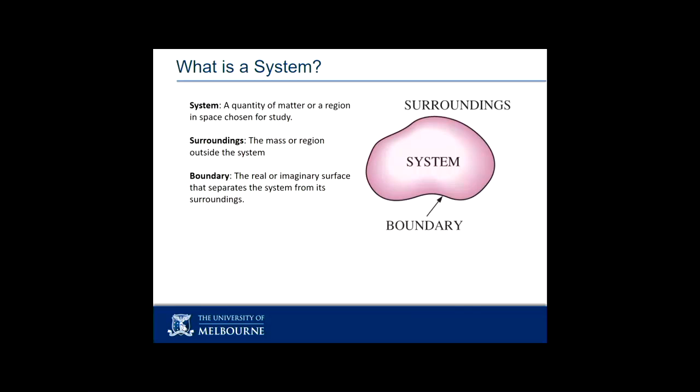Sometimes your system might be two molecules, and you're just analysing how they bounce, and then you are forgetting about all the other molecules and what have you. So you have choices that you can make. Early on in the subject, we have some really standard systems that we use for analysis because they have nice properties. So you will find us looking over and over again at a piston cylinder. And sometimes the piston will be at the bottom and sometimes the piston will be at the top.

But it'll generally be a container, and often we'll imagine them as circular cross-section with a disc that's either sitting, floating on a liquid or a gas, or a disc that's being pushed by something, like in a car. That system has some really nice properties. It's got some fixed boundaries, it's got some moving boundaries. Now there's some new terms.

All the way through the next 6 weeks, we will keep learning new code words. They're words that you've encountered before. You may recognise the word, you may understand the word, but they have a special use in thermodynamics. If I tell you that I have a fixed boundary, it has a mathematical implication to how you're going to solve the problem. If I tell you I have a boundary that can move, it has a mathematical implication on how you solve the problem.

So often I'll be highlighting words or bolding words, and I'll try to draw your attention to them. When they are not just an adjective, not just a description, they are triggers or code words for how my maths is going to be applied. So in the system, fixed boundaries are pretty easy to imagine because they look like walls, even though they might be imaginary boundaries. The fixed boundary of the door that's open at the back of the lecture theatre is not moving, but it doesn't exist.

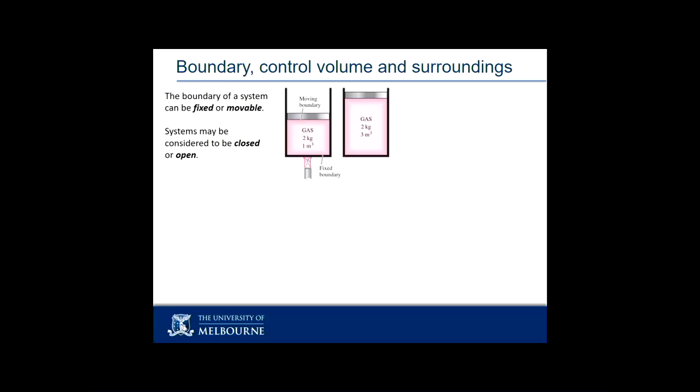Closed and open boundaries, again, code words. What I'm interested by when I define a system boundary is I don't care what is the surroundings, but I do care the influence that they can have on my system. There's two major ways you can influence your system from the surroundings. One is by mass coming into the system, and the other is by heat transfer in or out of the system.

The mass transfer can only happen if I have an open boundary. So the reason why we have this code word of closed boundary, if I tell you closed boundary, I'm also telling you there can be no mass transfer from the outside world to the in or from the inside world to the out. The mass of my system is fixed if I use the code word of closed boundary. If I use the code word of open boundary, my mass can change and I will probably need to keep track of the mass of my system. And I'll need to keep track of the mass flows across the boundary.

Both a closed and an open boundary can have heat transfer across them, unless I deliberately tell you a code word of an insulated device, in which case insulated will mean no heat transfer. So the difference between a closed system and an open system: the closed system has a fixed mass and can't change its mass. The open system, the mass can change. Both of them, heat can transfer across the boundaries.

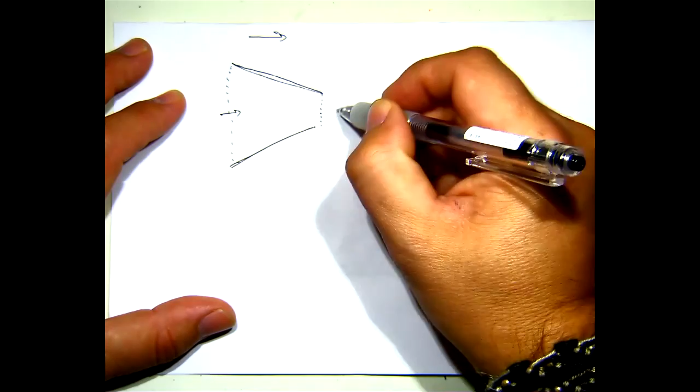I will draw some imaginary boundaries at the inlet and the exit of this nozzle. And the only thing I've learned over the years, the only thing I really care about is what mass came in, what mass went out, its properties, we'll cover those in a few slides' time. So that I can work out how fast it's moving, I'll probably also need to know the area of these guys, so that I can understand how much I've squeezed it down as it's flowing through, and I probably need to know the initial velocity.

So just the exercise of saying how fast is the water coming out of a nozzle suddenly requires me to know what's my system, where are my boundaries, what's crossing which boundaries. These guys are walls, so no mass is going out the walls of the nozzle, but mass is coming in the inlet and going out the outlet. So that's the systematic structure for setting up our problem.

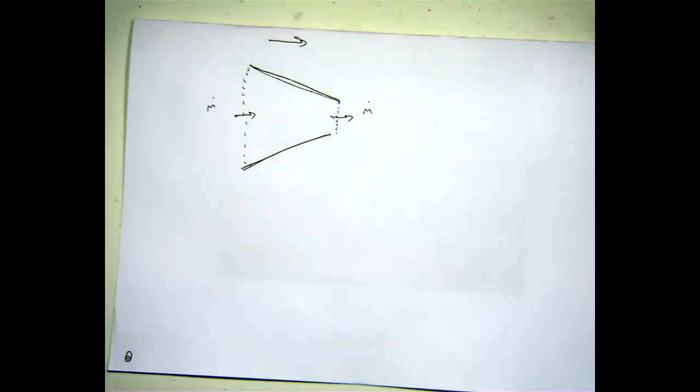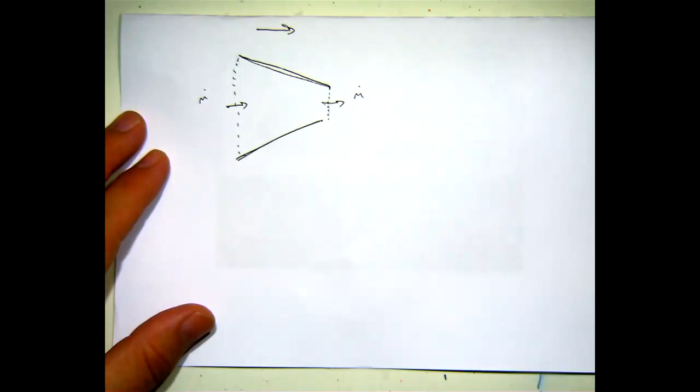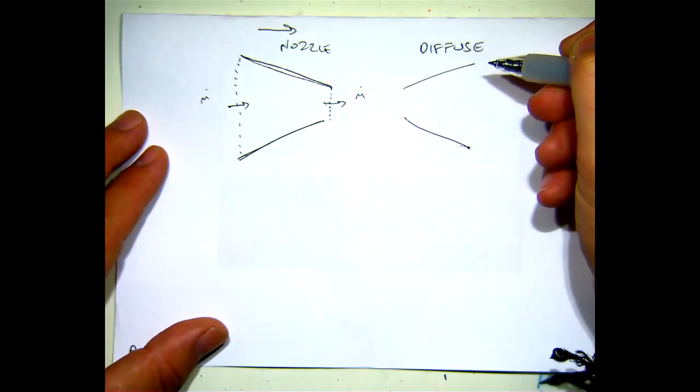That shape is a nozzle. There are other shapes. I will do them over and over again. The main stuff we play with are piston cylinders, turbines, compressors, nozzles, and throttles. Nozzles and diffusers. And so the opposite of that, this is a nozzle, this is a diffuser. A diffuser does exactly the opposite thing of a nozzle. Takes a fast flow and lets it slow down.

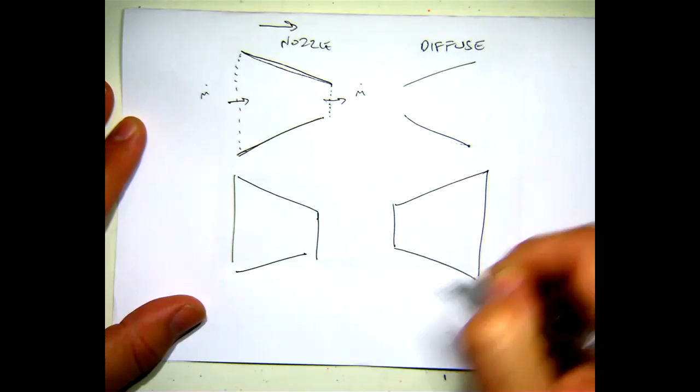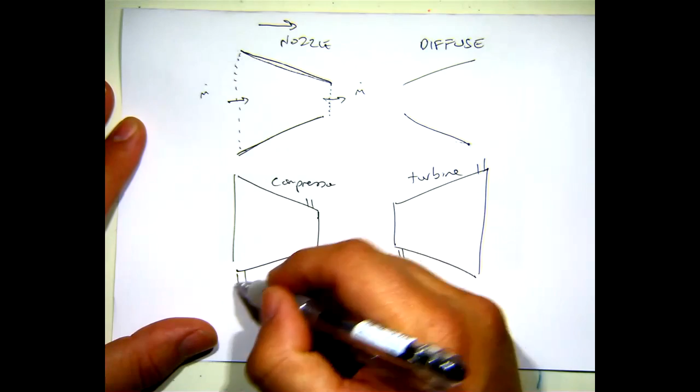If I drew them like this, these are my code pictures for a compressor and a turbine. And I still need an inlet and an outlet of both of these guys, so I draw little dotted lines. The compressor's job is to compress things. So again, going from this way to this way, it gets from bigger to smaller. The turbine's job is to do the opposite of a compressor. It lets things go from little to big.

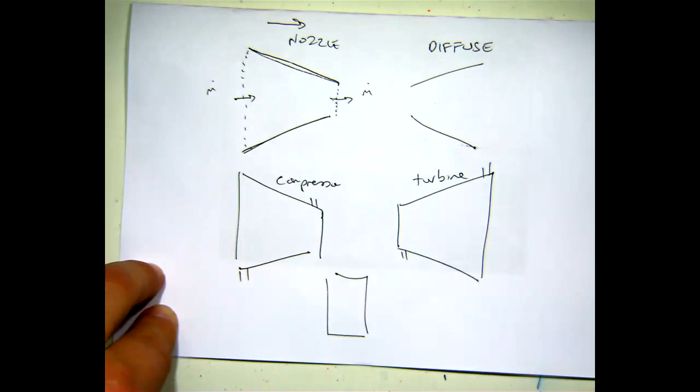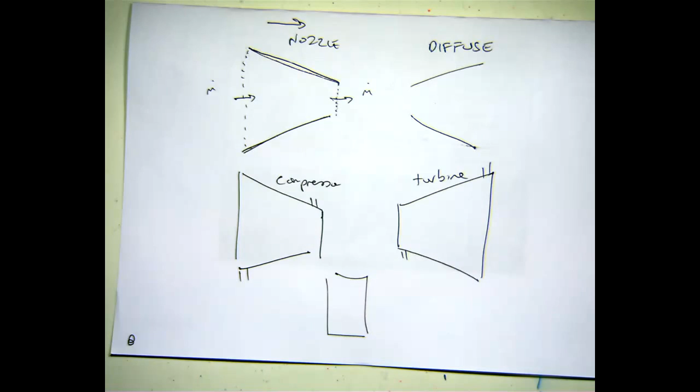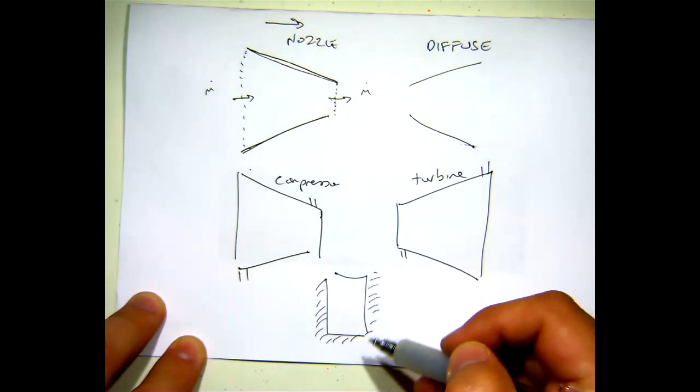And then if I was drawing a piston cylinder, I would probably draw a box. So I can draw system boundaries quite simply. I can sketch them quite quickly in an exam or an assignment. I can draw them with dotted lines to symbolize an imaginary boundary, or solid lines to symbolize a wall. And there's another code you can use for I'm not going to allow heat transfer, and that's to do little dashed lines like this. That's pretending I've got some kind of insulation around the thing, which isn't going to allow any heat to transfer. So that's some of the pictures we use. If there's any new picture, I'll show you on the way, saying this is our secret diagram for a throttle or whatever.

Let's get back up to the computer screen and the slides. Okay, good.

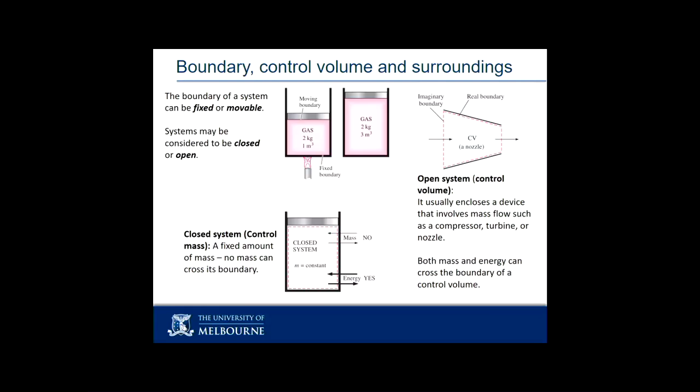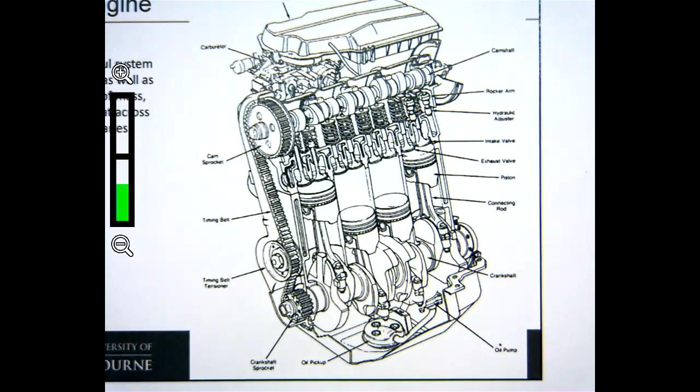This is a 1, 2, 3, 4 cylinder car engine. So now we know where the cylinders are. Here, here, here, and here. Well, the pistons are here. Cylinders are what the pistons are sliding up and down in. And there's all sorts of machinery around it to make all this work. So there's a crankshaft to push everything up and down. There's valves to let the fuel in and out. There's a timing belt to make sure all the things are moving at the same time and in a way that I want them to. And eventually there's a shaft that connects it out to the gearbox and then to the wheels.

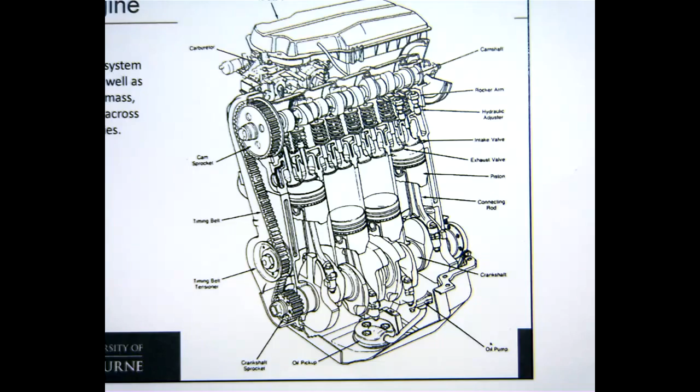So, where's my system boundary? The engine. Which bit's the engine? Depends on what you are testing. That's a different answer to the engine. Why is it different? Because if you are testing the cylinder, you put the boundary around the cylinder. So the engine could be this. The cylinder could be this. Are there any other system boundaries I can draw?

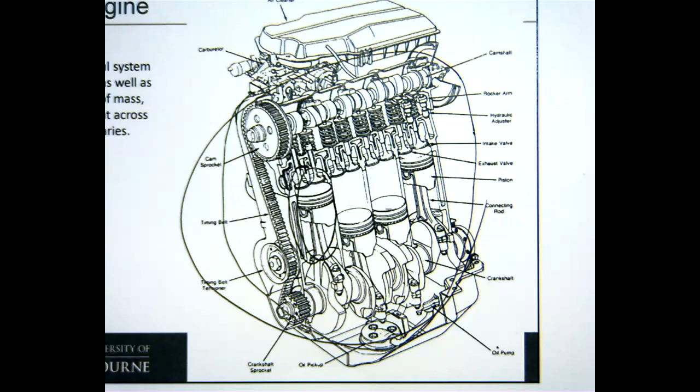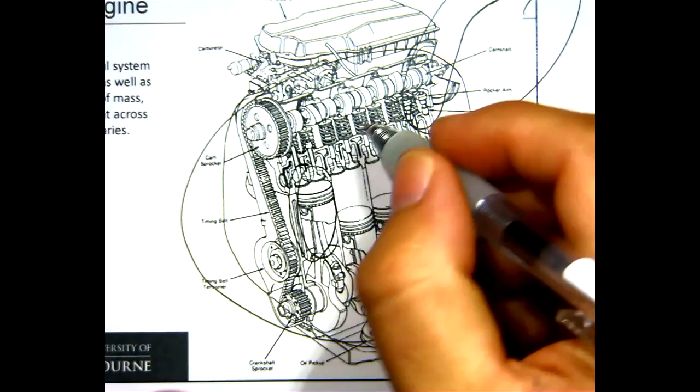No other system boundaries I could draw? I don't know much about engines. Doesn't matter. Are there any others? Can you see anything there that it would be possible to analyse? Maybe like the exhaust pipe. So let's imagine, maybe it's cut off from here, but let's imagine the exhaust goes that way. I could draw an exhaust pipe. Sorry? The valves? Yep. So I could draw here, let's say.

There you go, right up the back, Levi. The area. Sorry. The fuel tanks. Yep, so we've got an air cleaner in here, the fuel tank, carburetor. So the carburetor is where the fuel and air gets mixed in, so somewhere over here there's probably a fuel tank. Okay, so we could analyse that.

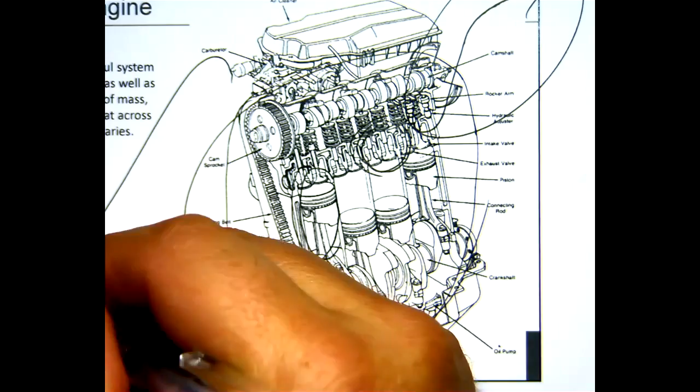Which one of these is the right system boundary? Yeah, you had the answer already, so it's kind of deliberately coming back to it. You cannot say. Why? Depends on the problem. So definitely. It's not defined, it depends on the problem. What's the problem? There we go. That's it.

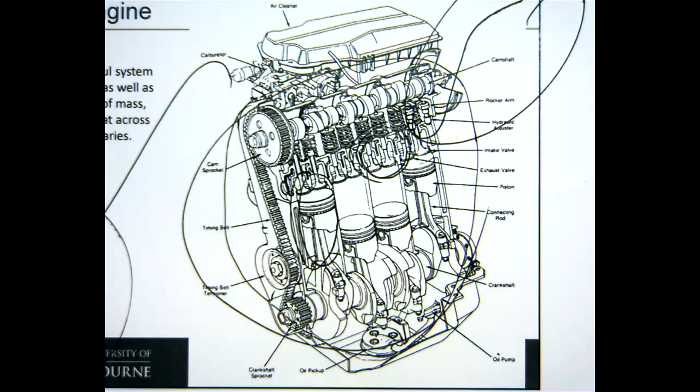I'm not deliberately trying to trick you or anything, just trying to hammer back down to this point: I can't tell you what the system boundary is until you tell me what it is you're analysing. Even after you've told me what you're analysing, I can't tell you what the system boundary is, because it's your choice as the engineer to make your life the simplest it can be while still being useful.

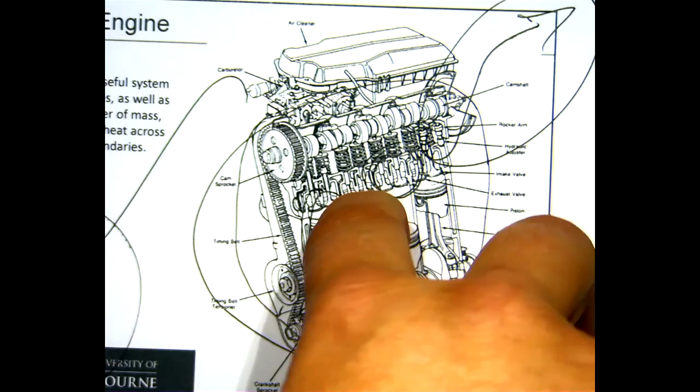So the simplest boundary to analyse anything about this could be the universe over infinite time, in which case I know the analysis of this: it ends up being a uniform temperature with everything else in the universe of approximately 0 Kelvin, maybe just a little bit above, with atoms distributed as energy everywhere. A valid system boundary, but not a useful one. So you're choosing the system boundaries and the time boundaries that allow you to solve your problem in the simplest

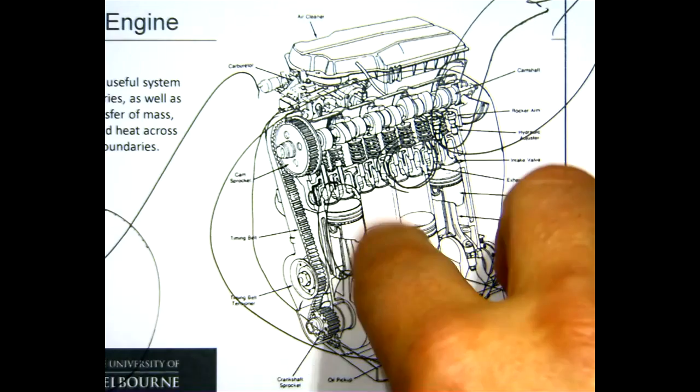and most precise way. Now we talk about the time boundaries as well, because the process of a piston moving from here to here can be analysed completely. The process of the cylinder doing a full cycle can be analysed completely. The engine driving from here to Sydney can be analysed completely, including putting fuel into the fuel tank a couple of times, depending on your car. You could analyse the car and the engine so that you've got some idea of road resistance on the tyre and wind resistance on the car.

It depends on what you're trying to solve for. If you're trying to solve for the drive cycle efficiency of long-term driving, you'd probably need to understand the car and its performance on the road with wind. So my system boundary is now the whole car. If I'm interested in understanding how much heat was released during one combustion event, then I just want to do the bit where I'm almost at the top and all my fuel burns and I just come a little bit back down again. In the gasoline engine, boom, burnt.

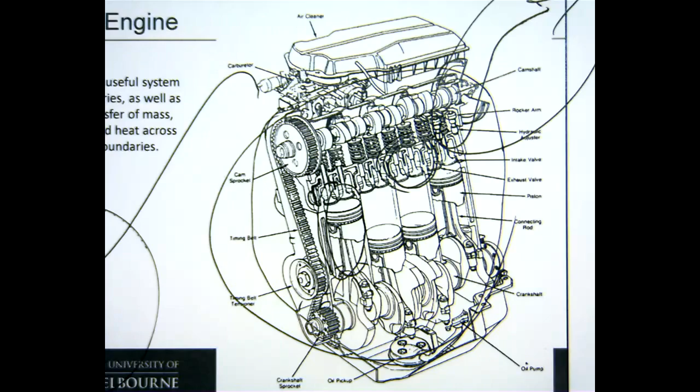The impact of that, now I've got heat in the chamber, might be a change in pressure and a change in the movement of the piston. I have the same system over a different time. I have choices to make. If I did it on a gas turbine, so the piston cylinder there had a lot of closed boundaries, it had some open boundaries as well.

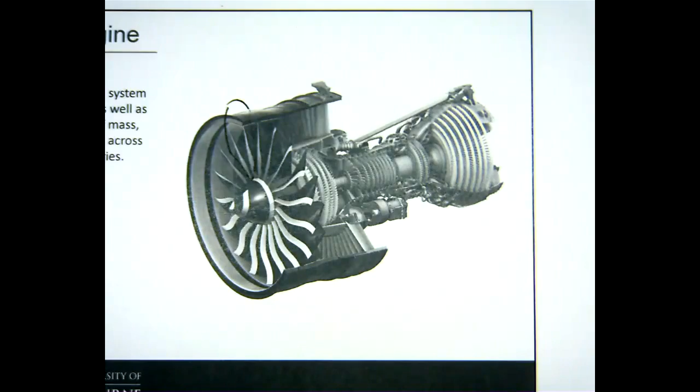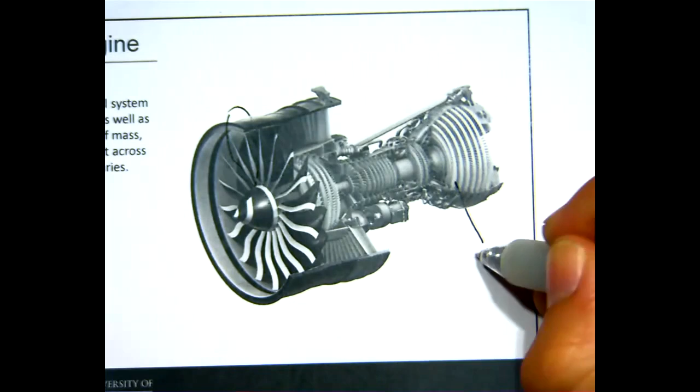If I did it on the gas turbine, same exercise, I could be analysing the plane, I could be analysing the energy system of the manufacturers of planes globally. I could be analysing the gap between one turbine blade and the next and watching the airflow just over that space. I could be analysing, well, that's not a turbine blade, the fan at the front. I could be analysing just one turbine disc here, and pretending I didn't even care what was happening with each blade. I just want to know how much air went in one side and came out the other, or the entire turbine.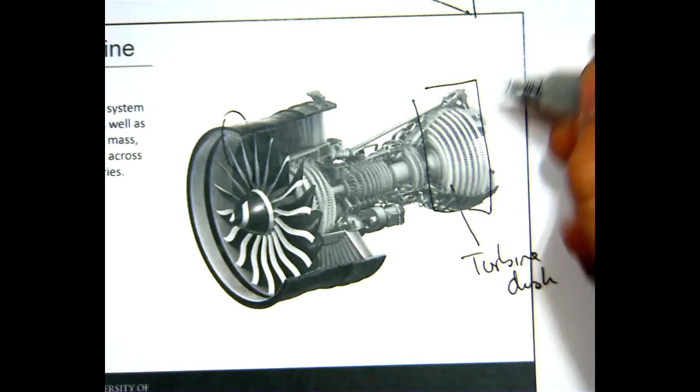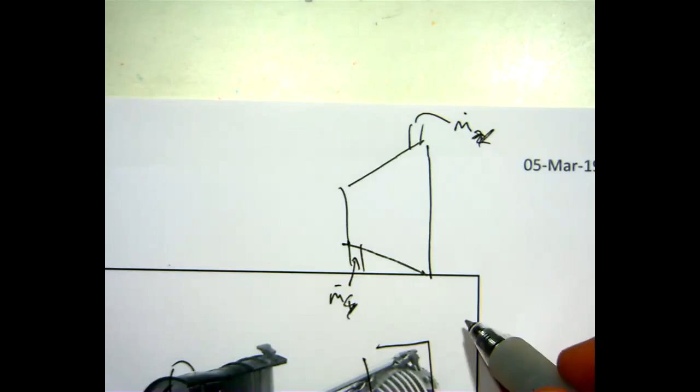One of the other neat things that happens with the system boundary in thermo: if I drew the system boundary for a turbine, air needs to come in somewhere, air needs to come out somewhere. If it's steady state, the mass that comes in has to be the same as the mass that comes out, because it's not changing with time. So... Sorry, I can't see? You're right. Thank you. That's the kind of feedback I need.

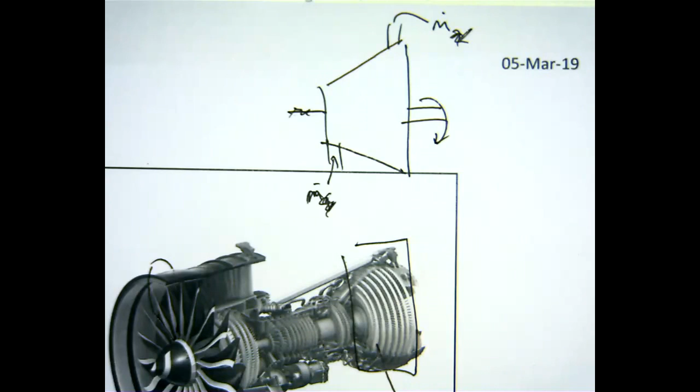So I've got a mass dot in and a mass dot out of a turbine, and that's just a picture of this guy. And I need a shaft that comes out of it so that the point of the turbine can be reflected as work done. I've sketched out that turbine. What can't you see in that system?

Can't see a single turbine blade or a disc or anything, any of the machinery that's inside the turbine. So not only by defining the system boundary, not only have I thrown away all of the outside world, I've also thrown away all of the inside world. So really what I'm interested in is what is the change of my system and its properties.

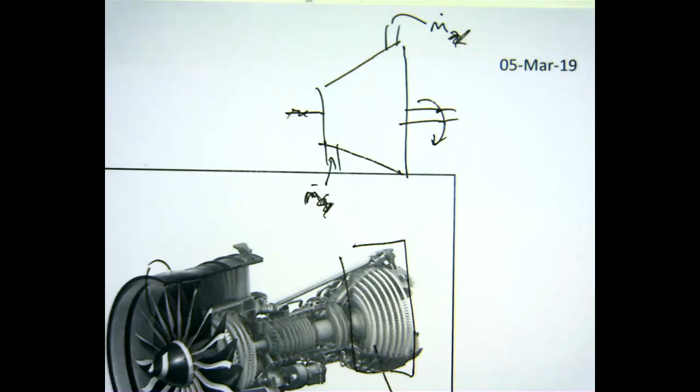So if I define the system as one turbine blade, that's what I'm thinking about. I'm thinking about the change in the temperature, the density of the steel or titanium. Has it grown longer, shorter, whatever? The space between two turbine blades, I'm interested in how much air was flowing through them, what change in pressure, what change in temperature, what energy was I able to release from it so that I could use it as work. If I'm interested in the turbine as a machine, I'm not analysing in between each blade.

And so inside here gets to be ignored. And that's another thing, a really nice simplicity that comes with some of the macro thermodynamic analyses. Likewise, if we look at a human being, I could analyse a leg or a body. I could analyse that over a sprint or a lifetime. I could analyse the head, but ignore the brain, just understanding what went in and what went out. But also maybe what went in and what went out.

Just one hand, one arm doing work. Where's the energy coming from in the arm? Am I using up just the arm's worth of energy, or do I need to connect it to the body system so that I know where the energy flow was? If I'm doing it over a length of time, do I need to understand the energy in and the energy out of the body? And that depends on what kind of human system you're analysing.

As an athlete, you're interested in each aspect of those because you want to understand, without putting any extra energy in, how much power can I get out of my body? As well as long-term over my lifetime, over the season, over the week, over the day, over the game, how much energy can I get out? So what do I need to put back in to keep the system functioning? How do I keep up maximum efficiency, etc.? All of those require different settings of system boundaries.

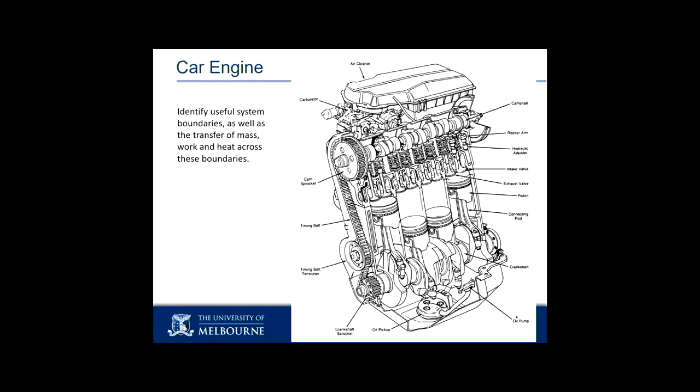Let's get back onto the computer. Any questions about system boundaries before we jump on? Okay.

So that was all about the simplifications we make in our world and the choices we have to make right at the very beginning of the problem. On the way of starting to wave my hand and describe these things, I've already jumped into two other ideas. One is that one of the main things we'll be doing is looking at the change of a system. And if I just draw a box and say this is my system, I have no numbers. I have nothing with units, I have no information or data about that system to analyse.

So the next step in our definitions is the definition of properties. And these are not mysteries, these are things you've been working with all the way through physics, chemistry, engineering, maths. But we're going to characterise them in a way that works for us. There's a couple of different forms, so I could tell you about the mass of something, or I could tell you about the mass of something per unit volume. I use that information in different ways. Both of them give me information about mass. One of them is a bit more generic, one of them is a bit more specific. So we'll have a look at these different classifications.

A property is any characteristic of a system. So we've just spent some time working out what a system is. And on the way, I start waving my hands around the ideas of temperature, volume, pressure, mass. So these concepts are not strangers to us. These are the properties of the system. These are the things that we can watch change. We can measure them, we can understand them, and importantly, we can predict what happens.

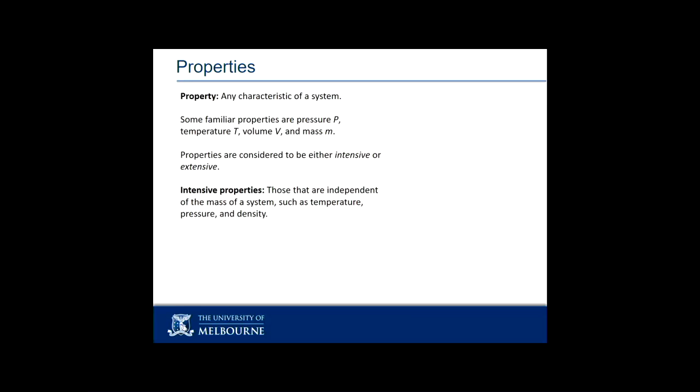If I have this room, let's imagine that this bottle, I'm going to open the bottle so that now I can confirm that it's at the same pressure as the room. I close the cap. This room, or the air inside that bottle, very different mass of air, pressure is the same. So pressure is independent of mass, density independent of mass, temperature, bottle, room, very different masses, same temperature. Temperature is independent of mass. These are called intensive properties.

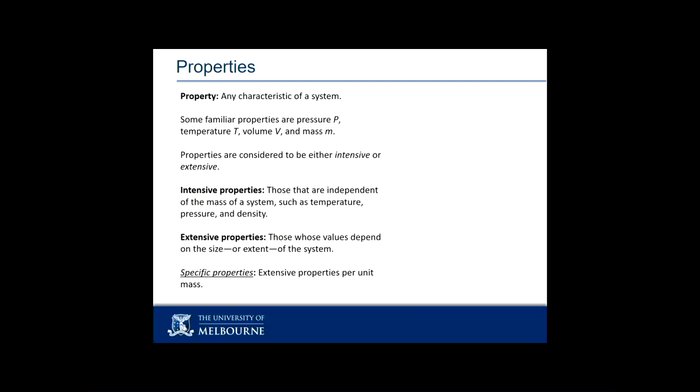Extensive properties are connected to the mass. So the first one of those is the mass. Right? If I have twice the mass, I have twice the mass. And we keep track of what things would change if I had more or less mass. The other one that changes really quickly is volume, which is one of the reasons why we connect mass and volume, why we have the idea of density. And in thermo, we do a lot with the inverse of that guy, which is called specific volume, the volume per unit mass, as opposed to the inverse, which is density, the mass per unit volume.

The reason we take the time to define intensive properties is that a lot of what we do, we try to keep independent of mass so that my answer for how does the system change as I do something can be scaled from this big to hundreds of megawatts or gigawatts of power. The analysis is the same if I can ignore the mass. So a lot of what we do is per unit mass. When we're doing the chemistry-related stuff, advanced thermo, you're doing combustion, and it's all about chemistry, you do it per unit mole. So the intensive properties where we normalize them by the mass or the mole, we do that to save ourselves time and give ourselves an efficiency in the calculation.

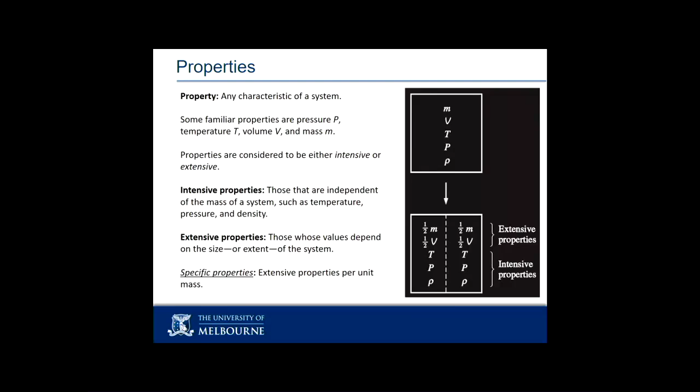So, we do a lot early on with boiling water. There's a reason why we do a lot with boiling water. What's a nice property of boiling water? How hot is atmospheric pressure boiling water? Yep, 100 degrees. And if it's atmospheric pressure in the room and I keep boiling the water up until the water's gone, it's going to have stayed at 1 atmosphere pressure. The pressure that's acting on that water is the pressure of the room. It's a nice thermodynamic process for us to analyse because it has some simplifications in it that let the maths be easy.

If I have 2 kilograms of water boiling or 1 kilogram of water boiling at the same pressure, there's 2 different masses of water. I'm going to need a different amount of heat to boil them, but the temperatures of them through that boiling are the same. Those 2 systems, we say that they are at the same state. So there's another code word. The state of the system is a shorthand way of saying all the properties. So if I say the state has changed, I'm saying the properties have changed.

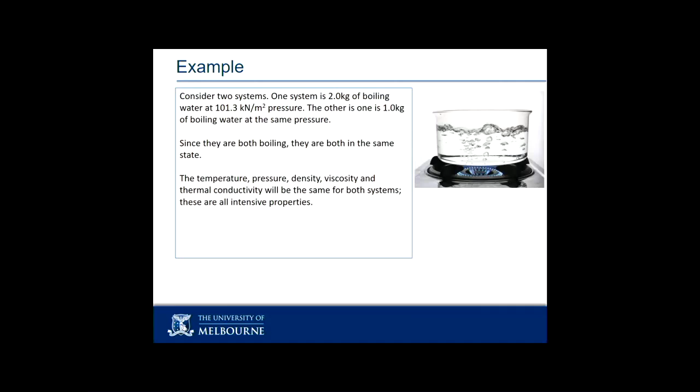If I can say that I know the state of the water because of some reason, and there's a very important category that we use for those reasons. If I can tell you that I know the state, I can tell you, therefore, that's shorthand for: not only do I know a few properties, I know all the properties of that substance. So I don't need to measure them.

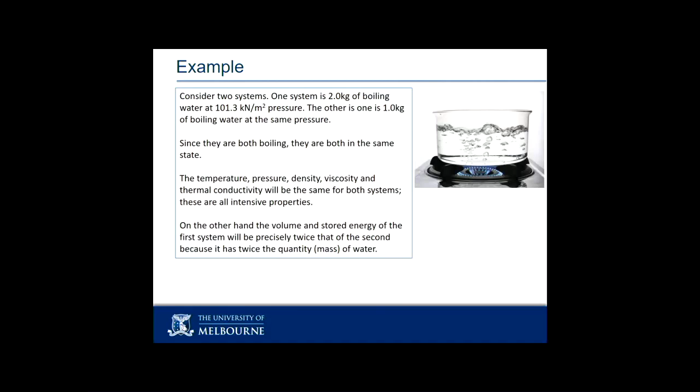So how can I define for you the state? Let's just finish that off. As I said, it takes a different amount of energy to boil more water than less water. So when we're dealing with energy and power, we will be interested in the extensive properties. When we're doing the analyses, we'll analyse it on a per kilogram basis and then say, okay, and how many kilograms were there? So we go energy per unit mass for a change. Now there were 2 kilograms, so let's double it. Okay, so that's equations of state.

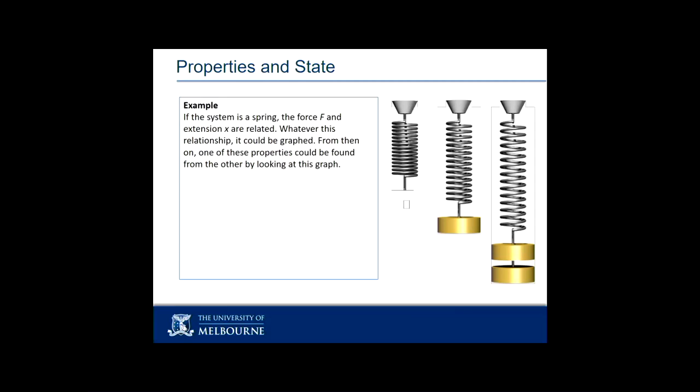Now that we're interested in hunting down how do I establish that I know the state, we'll play with a couple of ideas. The answer to how much information I need to know depends on how those properties are connected. I've got up there a spring, and then a spring with a mass, and then a spring with double the mass. And what's the relationship between mass and distance of a spring? F equals xk. Mass and distance? Yes. And property of the spring. So I need to know the force, so the mass goes to force. Yep. And then x, distance, and then k.

So what I've got there is a really simple relationship. If I know something about the substance, the spring, which is k, the spring constant, if I know the force, I know the distance. If I know the distance, I know the force. So there, I only actually need to know one property of the system to be able to define all the other useful properties of the system. In working fluids, I might need to know more properties before I can pin it down.

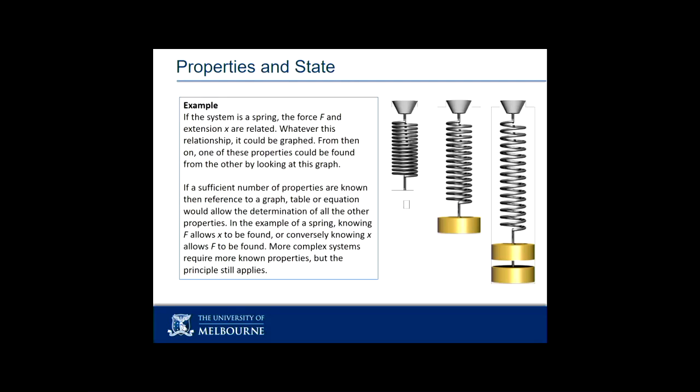We will get in the habit. So this kilo of water that we were boiling before at atmospheric pressure, we know is 100 degrees. Now what was interesting is I said the water's boiling at atmospheric pressure. What's the temperature? You guys said 100 degrees. You didn't calculate it. You didn't look it up. It was in your head. That was because you memorized it, and because it's a fairly well-known number. But the exercise is how many pieces of information do I need to give you before you could tell me that? If I told you that we were up on the top of a mountain and the atmospheric pressure was much, much less, would the temperature be higher or smaller?

Right. So you may not know the number off the top of your head, but you know it's going to be smaller. You know that somewhere in this world I could probably look it up. If you told me the pressure, I could probably work out what that boiling temperature was. Somewhere there's a textbook or Google or whatever. Which means that I've only really given you 2 pieces of information. One was that it is boiling, and the other was the atmospheric pressure. We will do that over and over again. If I get 2 properties for working fluids, I've defined the state. They have to be independent properties, though.

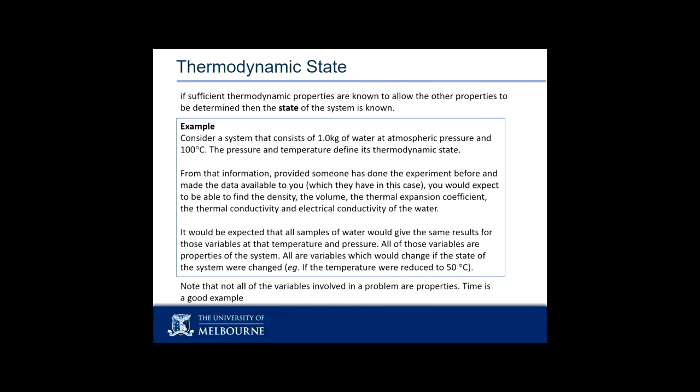This example here, well, that's different words for effectively what I've just said. Okay. The key there is dependent and independent. Early on, imagine you're beginning to solve a problem. System boundary, what's my working fluid? Next step, how many properties do I know and have I defined its state? Once I've defined its state, I can continue. So early on, we will be looking for how many independent properties do I know and do I have enough to then say, we're done.

The answer is I need 2 independent properties for working fluids, because I'm interested generally in pressure, volume, temperature, mass, all these things. So if I have 2 things that are independent and known, I can do this. An example of things that are not independent: density and volume are not independent. If I change one, I do change the other. So we're looking for ones where if I change one, I don't automatically, by definition, change the other, unless I know what else has happened. Volume and pressure are independent, because knowing one doesn't give me the other. So the state postulate says two independent intensive properties.

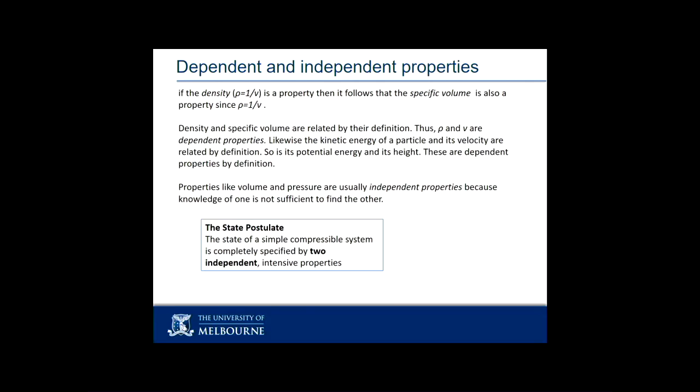And let's keep going. So Hooke's law, which was the spring law, was F equals Kx. In the world of thermo, that's referred to as an equation of state. The equation of state says if you give me some of the properties, I can calculate the other properties. So it's not even that I'm looking them up. Depending on the system, there are actually already loads of equations of state that you know. We just haven't called them equations of state.

If you're in Foundations of Electrical Networks or anything electrical, you would know that there is a relationship between voltage and current and resistance. I hope. I really hope. That is an equation of state for that system, for that type of analysis. And if I know two of the things, I can get the third one.

The one we use all the time is what's called the ideal gas law. And I will tell you when we are ideal gas and when we are not. We'll do that on Friday. PV equals mRT is your ideal gas law. You may have seen it already, either from high school physics or university physics. A couple of things in here. We've got pressure, volume, mass, gas constant, and temperature.

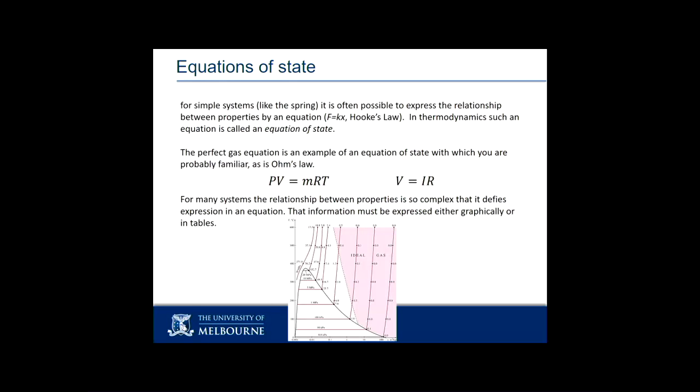If I change the volume without changing the pressure, I could tell you what happened to the temperature. If I change the mass, I could tell you what happened to the system. There's lots of stuff in there that I can already do. That tool we use all the time. So this is one that I want in your head because it'll be one of your major tools off the shelf for thinking: something's changed in my system, can I work out what happened? The way to use it is to say what stayed constant, what changed, by how much, therefore what's the result? Inside everything I've just said is this idea of change.

We define that as the process. The whole point of the analysis is to understand what happened next, what happened after. What happened after some time passed, what happened after I squeezed things, what happened after I added some heat and it all got hotter. What was the change? Thermodynamics, what was the change in the energy?

And so we've got systems, we've got properties, and now I need to know how do those properties change. They change through the action of some kind of process. Which process lets us work out the answer? Which is to say, saying what the process is gives me the maths to solve the problem. If I say this thing changed at a constant pressure with a constant volume, I have enough information, but I've given you information about how the process occurred.

If I say the process happened slowly or quickly, if I say the process happened with heat transfer or without heat transfer, if I say the process happened with mass change or without mass change, I'm telling you something. And so we can trace the start and the end. We can put them down. The dots on the graph are the states. The state at the beginning, the state at the end. The line between them is the process path.

Sometimes we don't care, sometimes we do. We're going to spend a bit of time over the next few weeks working out when we care and when we don't. Whether that was a straight line, a corner, a nice little arc. Sometimes I need to know, sometimes I don't. Sometimes I just want to know what was the end condition. Other times I need to know how much energy was used to get there, or how much energy would I need to put in to get there. And it depends on the process. So we will get a whole series of definitions for different process types.

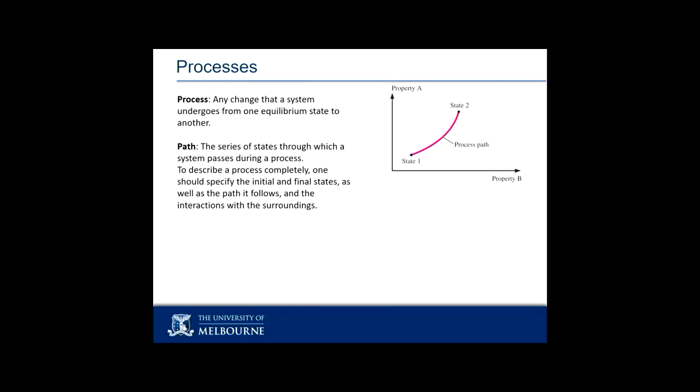There's one last little step. Many of the processes we need to put in a little mathematical caveat, a little mathematical asterisk that says we need these processes to be occurring in what's called quasi-equilibrium manner. Literally the first few slides of the next lecture I will give a proper definition for quasi-equilibrium. The answer is, at this stage of thermodynamics, everything is fine. Everything obeys enough rules that we can do it.

This idea of quasi-equilibrium, is it happening fast? Is it happening slow enough that the state, at any moment in time, the state of all the molecules is the same in my system? Everything we're going to analyse, the answer is yes. I flag it now because it means that there is a world, there is a set of processes where things happen so fast, explosions, detonations, stuff goes on, where you need different thermo rules.

So we're just doing the intro thermo rules, so we're going to stick to the assumptions that make our life easy for now. But I want you to be aware that assumptions were made, so that one day when they're broken, you go, oh, hang on, no, I knew that. I knew that that was a thing.

So what we've done over the last sort of 40, 45 minutes is lay the framework and the ground rules. To solve a thermo problem, we need a system with system boundaries, and we need to know how they behave. We need a state and properties, and then we need to know something about how they changed, because just watching something not changing is mathematically and engineeringly uninteresting.

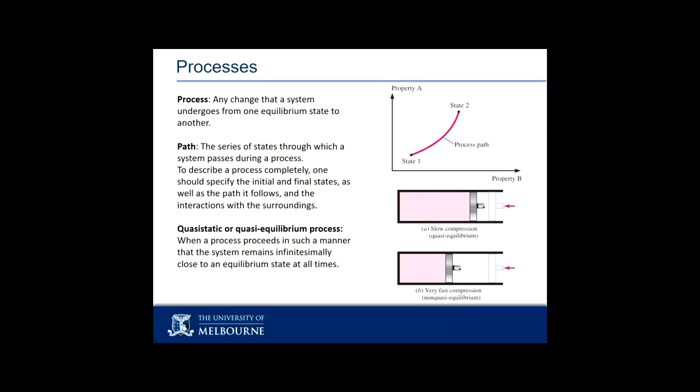After this, Friday, so 3:15, same room, we'll look at thermodynamic equilibrium, we'll look at the ideal gas, and we'll look at the ideal gas rule, and we'll play with it, and we'll look at processes and cycles. That's the bit where I'm going to actually give the maths or give the definition of each of these magical processes that we're going to use as tools. And the ideal gas law we'll play with a bit more.